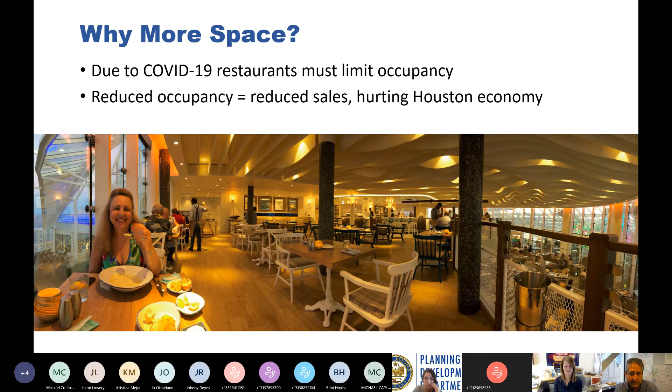We recognize that especially downtown has no off-street parking store by store. So we wanted to look specifically at Main Street to see what we could do to help you. So this is kind of phase two, the More Space Main Street specific part of it, where we're talking about Main Street from Commerce to Rusk, where we're saying, okay, Main Street really doesn't function as a through vehicle street from end to end anyway.

There are a lot of turns, there are a lot of the pedestrian plaza at the south end at Rusk. So if we closed it to vehicle traffic and said sidewalks would remain for walking, but the road space where vehicles go today, restaurants and bars could put tables out in that space because it's no longer being used for vehicles. And we're talking about a pilot program from once we get it up and running through March 2022. So a good long time so that we can really help support you all, and that any investment made, you have time to make that back and really populate downtown so it's active space, and we're both supporting the economics and supporting the livelihood of downtown.

Before I go to that, I do want to say this is a partnership. The city is leading it because obviously we have a lot of levers we need to pull to get this done, but the downtown district, represented on the call by Angie, has been an amazing partner. We've been working step by step all through, as well as with Metro, who, as you all know, has quite a presence on Main Street.

It is not as simple as just closing the street to cars because we've got a train running down the middle of it. So there are many more safety components of this that we're still working through, and we're getting close, but it's all of us together here helping you.

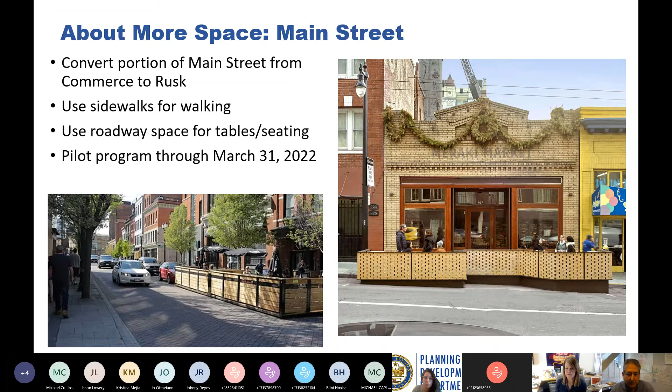So who can participate? We're talking about bars and restaurants in this stretch with the understanding that we have to follow the state and any other restrictions on businesses that are out there. So right now, restaurants can open. So that is what we're focused on right now. We're imagining pretty soon, fingers crossed, bars will be able to open also, and they will be allowed to participate as well. But we can't supersede a statewide, closing, temporary closing of those businesses.

So we have to understand it may be rolled out as those openings happen. We understand that different properties have, some have businesses on multiple levels, and we can accommodate that, but we need them to work together because it's really the building footprint and frontage, which is our starting point. And I'm going to go through all of that in a sec. But if we didn't want people to worry that if they're on the second floor and don't look out on Main Street on ground level that they can't be part of it, yes, there's a role for you here too.

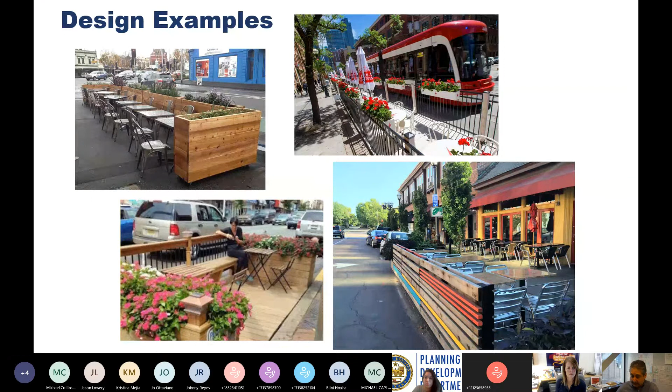So I described briefly what we were looking at. Here are some examples from other cities, what they've done to allow restaurants and bars to open up in vehicle space with different types of fencing or different types of planters, either on the street level or on a raised platform. The top right is in Toronto, which is actually our closest example because they also have a streetcar that runs down their street. So you can see it does make kind of a different form, but it is doable and we are learning a lot from them.

So I want to talk to you about what different buildings would look like and how we can accommodate different forms. I apologize, I'm not a graphic specialist, but I put these together myself Monday night, I think. So I'm hoping you can all work with me.

So imagine the first case is a business in the middle of the block. They're not at the corners, they're at the middle of the block. So if you are looking at a corner and you're looking north, you will see the building line all the way to the left. You'll see the sidewalk, which is 8 or 9 feet or so. Then you'll see the vehicle lanes, which for most of Main Street, it's somewhere around 10 feet.

And then you'll have the rail in the middle of the street, and it continues on, repeating on the other side. So option 1, if you have a business in the middle of the block, you have your building, the sidewalk, and the vehicle lane space becomes where you could put tables.

But one important starting point we realized was that to meet ADA requirements, we need to put in a ramp from the sidewalk level down to the street level. Looking at the street in cross section, that orange block would be a ramp sloping down. A ramp like this has to be, for every 1 inch of curb height, 1 foot long. So an 8-inch curb needs a ramp that's 8 feet long. It does take up a bit of space.

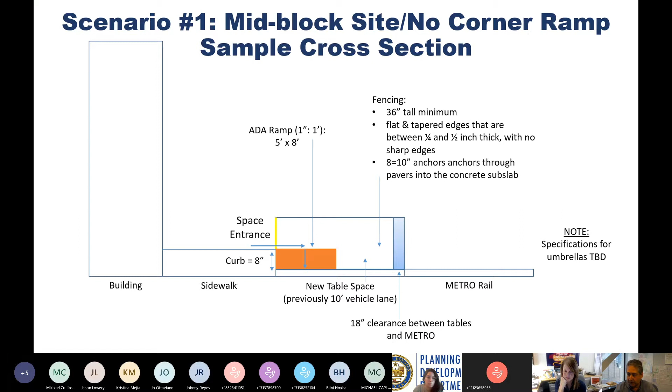Another view of the same idea: this is that same mid-block business looking out from the building line, the sidewalk line, the entrance to the ramp at sidewalk level, sloping down to the right in this version. The space between the ramp and the metro tracks is that space in the roadbed.

We also want to reiterate, and I know you'll talk about it in more detail, that we're envisioning if you're on a corner space, you wouldn't need that because you can utilize the existing corner ADA access. But if you're mid-block, we could potentially place ramps in inactive spaces, so instead of being part of your sidewalk cafe, it's outside of it, with just a side or back door entrance. That way you're not taking up real estate within your street patio.

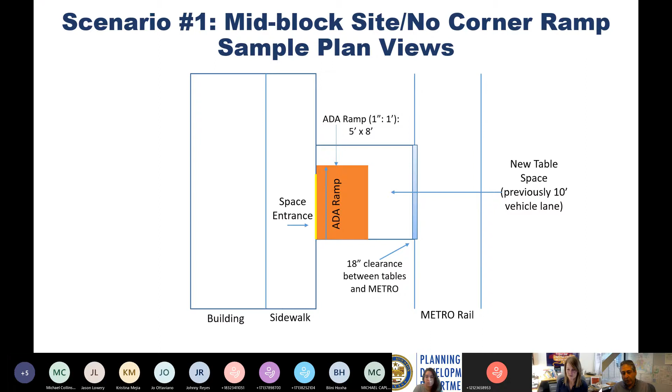Yes, and I'm about to talk about corners in just one more second. Sorry. Yep, no, that's fine. Angie and I have been tag teaming on these, so she'll jump in a bunch to make sure I give all the information. Feel free to put notes in the chat or raise your hand. This is all to be transparent and give everyone the information.

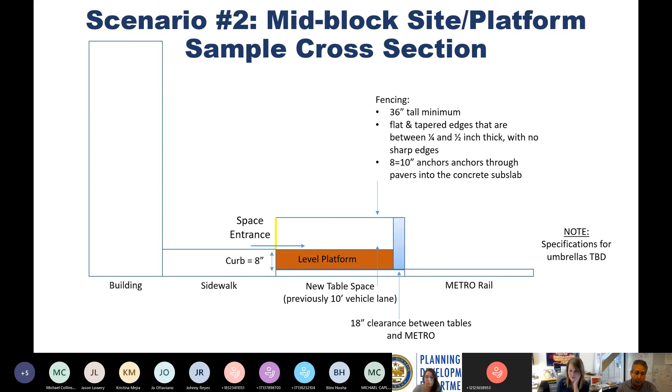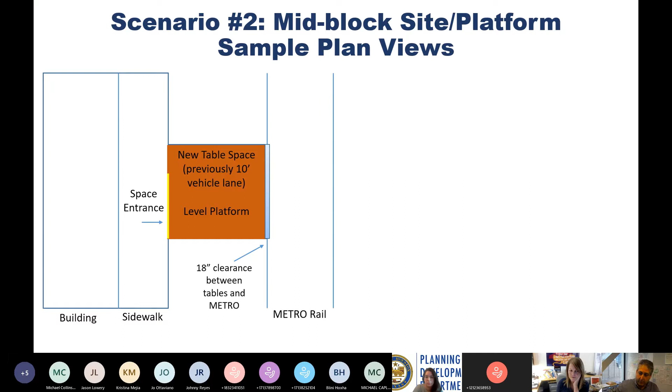Let's go on, there's one more option before corners. One way to avoid needing a ramp is to build a level platform at sidewalk level. This is the same mid-block cross section, but instead of the orange ramp sloping down to an elevated space and street level space, this is one level platform straight across, which actually creates more space for tables. Everything else is basically the same. This is what it would look like from top down: you come out from the restaurant, across the sidewalk, and right out to the level platform.

But going to what Angie was talking about, imagine businesses at the corner. What we get to utilize is what already exists, which are ADA ramps that already exist in the sidewalk at every single corner.

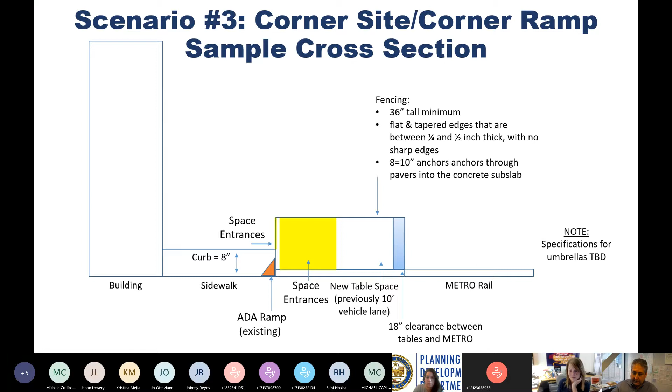So if you're at a corner and we have those ramps, we don't need to add a new one. You can come out your front door, your customer can come down the ramp into effectively, imagine the crosswalk, because you're at the corner, and turn left and enter the roadway level space from there without having to add a ramp. So you would need an entrance at the sidewalk level and an entrance at the street level, but no ramp for it. This is what that looks like looking down from the top, and that does save a lot of space.

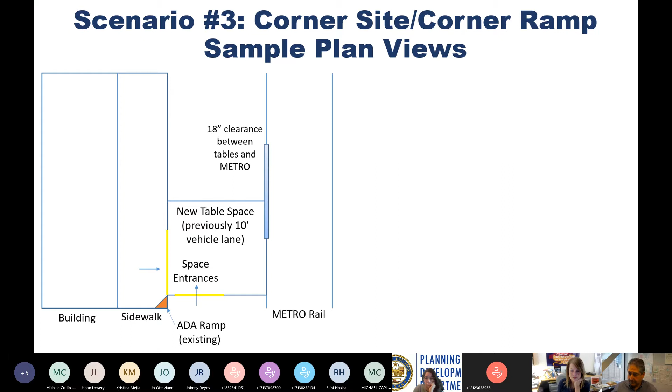We've got tons of information on what ramps look like. The downtown district, being fabulous people that they are and partners, Angie, I don't want to steal your thunder, but are offering to fund those ramps, right? Did I get that right? Yeah, that's correct.

Well, we're expecting that you would not have ramps going directly into your street patio. So if the ramp is located in an inactive space into the roadway, we would build that and cover that expense.

We're about to go through, there are a lot of different combinations about what is going to go on every block based on how many businesses want in. That's going to tell us how much free space exists between there. And it gets complicated. I'm telling you right now, everybody, this is not simple. Otherwise, we would have rolled it out months ago. We've been working every step of the way, so I understand if there'll be a lot of questions here.

Before we go off the ramp topic, if we have one block in particular, the 300 West block, where we have so much density of businesses, we foresee it literally being sidewalk cafe abutting sidewalk cafe abutting sidewalk cafe, or street patio abutting each other. There may be instances where a ramp just is not doable, and we're willing to potentially not require it as long as there is a sidewalk cafe in place that is ADA compliant. So the 300 block is the only one that would kind of fall within that. We want to do our very, very best to make sure that we have ADA accessibility to street patios, but there may be a couple instances where that just can't happen, and so we'll work through those issues.

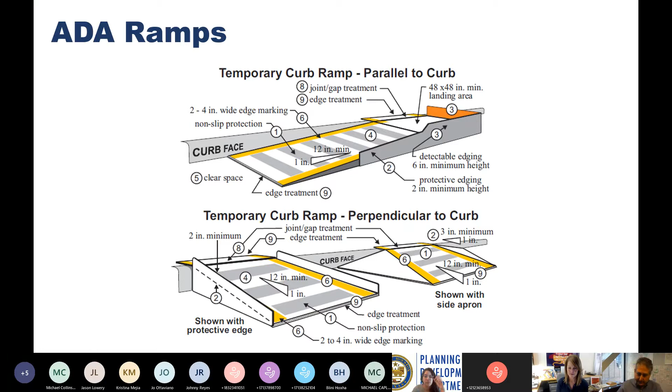Okay, so how much space out there? I'm not even gonna make the joke. I'm gonna leave that alone.

So how much space could you have? In theory, we could have just said every business can have just the linear frontage that their business fronts onto their sidewalk, just extend it out into the roadbed. That would be simple, and that would be the bare minimum. We didn't think that was actually doing as much for you as we would like to do. Part of this is to activate the space, and to have a whole lot of dead zones without activity and have businesses that would like to use more didn't really meet the project goals. So we want to accommodate, we want to provide options that if there is space going unused on your block, we want to figure out ways for you to use it.

And in that case, that corner ramp would also be accessible to you because your patio, your street level is filling up all that space in there. Obviously, if you're just on the corner, you have that space. If there is nobody between you—one good example is Finn Hall and Shake Shack, there are no other restaurants or bars in there—so those two businesses can go halfway to each other in the street bed. We want to fill that space as long as they're going to use it for tables and chairs.

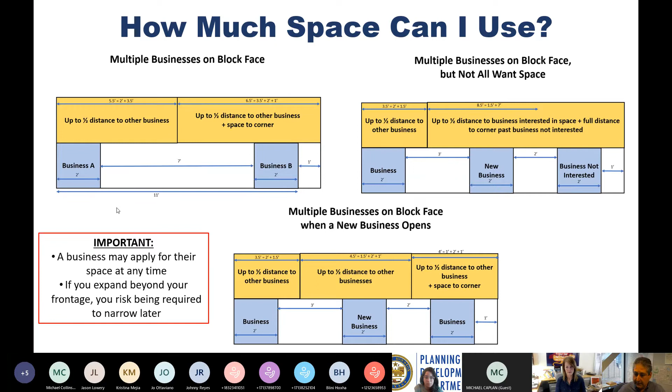So some additional components. We are packaging this as a proposal to City Council, and I'll go through the schedule in a moment. City Council may accept it wholesale, or they may make changes. The mayor has been incredibly supportive. Councilmember Gallegos, who represents this district, has been pushing us forward, and he's very supportive as well. But everything we say here is still subject to final approval by City Council.

We are proposing to them no fee for participating in this program. What we're developing right now, we don't have it yet, but we're working on it, is the application package that Angie was just talking about, which we're going to make as easy on you as possible while making sure we have all the information to know people are being safe.

So things like who's the business, who's the applicant. We will provide the specs or recommendations on design material, but you'll have to show us what it will look like, sketch it out. You're going to have to confirm that you understand the program details, including that very important point that if you are bigger than your frontage, you may need to narrow later. We're going to make sure everybody confirms that so we don't have any confusion later that was not clear, and that you are responsible for your TABC requirements.

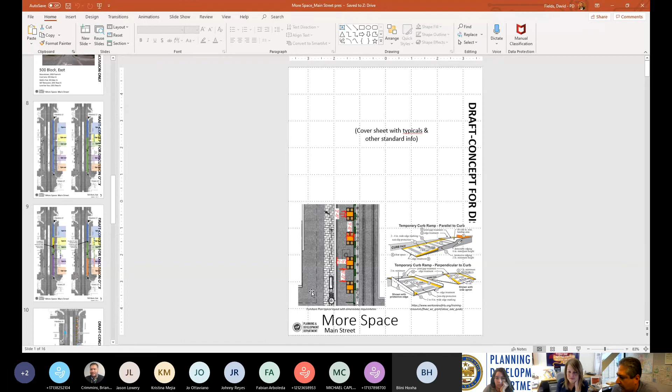500 west, between Prairie and Texas. Both? Oh, we have both locations. Okay, east side, got it. So I'll start on the east side. 500 east, can folks see this?

Okay, now remember what Angie said at first, we have randomly assigned ins and outs at this point. These are not set in stone. This is not moving forward. These are for illustration, concept only.

Give me a street number. Did you say Moonshiners? Moonshiners and Boots and Shoots. Boots and Shoots is 506 Main. So 506 is the west side, right? Yes. Okay, so we'll start with Moonshiners on the east side. Hopefully you can see my mouse, that's the lavender color box that's popped in at the top corner.

Okay, so just as a starting point, work with me here. If nobody else on that block wanted space, in theory, you could take that entire block length and fill it with tables and fencing. Understand though, we're asking you to only take space you're really going to use. And because you're on the corner, no ramp would be needed because we have the corner for you.

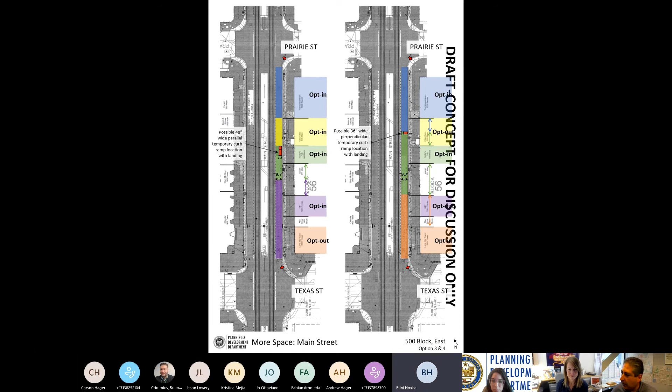And then different combinations depending on if some do or some don't opt in, we're going to have to work with you all as we see who's interested. And then I think you wanted to look at the west side also? Yes, please, if you don't mind. Yeah, of course.

Boots and Shoes is also the furthest one north because there's no business right now in the corner. It's vacant as far as I know. There is a business there. There is, I haven't been able to get in contact with them, so we'll just have to. Okay, well, is it a restaurant? I'm not sure exactly what it's leaning at. I think it's more of a bar. Yeah, a little bit more of a, not sure, nightclub. It's supposed to be a restaurant, but. All right, well for sake of argument, let's call it a bar which can't open right now.

We'll use that as our concept idea. If they can't open and you wanted to take that entire block to the corner, you could, with the understanding, and I'm saying this several times, if they come in later and want their space, you'd have to pull back from there. Understand. Okay, and Boots and Shoes is a bar as well, but Bini, we need to try to find a contact for the corner space just so we kind of have an idea if they think they'd be interested. So you don't go through a process and something happens.

And then south of you, that is vacant, right? Yes, so you could go halfway down to the next business, which is a little bit down, because nobody will be taking that space. Correct. With the understanding that if a business goes in there at some point and wants it, you'd have to pull back again. No worries on that account. Yes. Does that answer that? Does that make sense?

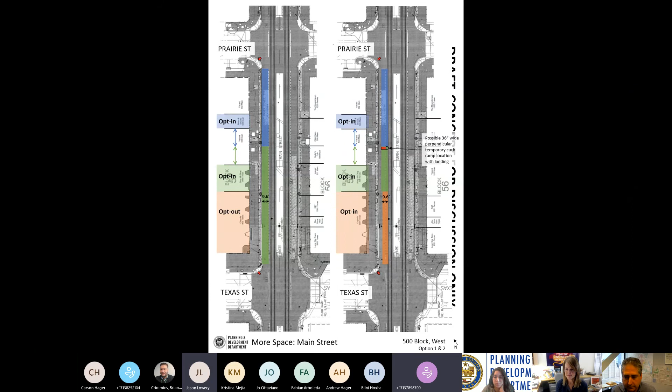Anybody else on the call would like to talk about a block? Yes, can we look at the 300 block, please? No, west side, that's the busiest one, right? I mean, 400 block, sorry. 400 block, we can do them both. So here is 400 west. And which one were you interested in?

With Bovine and Barley, and then our closest neighbor, I think he sent a typed text on here as well. Commoner, yeah. Okay, so Bovine and Commoner here and here. So we're not sure yet about what is that? Local Foods? Do we know Local Foods yet? Local Foods, the south corner.

Yeah, so if Local Foods did not want in, you could go all the way to the corner and then not need a ramp. If they did want in, you would not be able to go to the corner because they'd be there. North of you, that's vacant, so you could go halfway to the Commoner. So that expands your space. With that caveat, if somebody comes in later and wants it, you'd have to pull back. Right, and I apologize, my dad was a lawyer, so I hear his voice with the caveats saying make sure you say all the clauses and everything. And the Commoner also could come halfway to you.

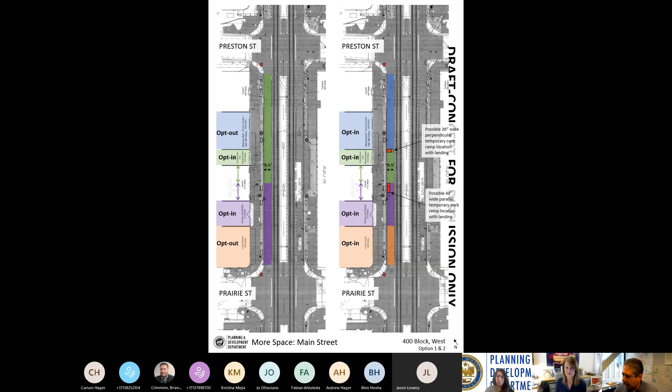Okay cool, I think I heard 300 Block West as the next one. It's complicated because there are a lot of businesses here. Did anybody want to focus on one or two particular ones? I'm good on that, I actually said it by accident - I was looking at something else, I forgot where he was located.

Anybody else want to talk about a block? Okay, just without requiring a commitment, just kind of a straw poll - people interested in this? Do they want us to be working on this for you? On which part, what do you mean? The overall program, doing it. Oh yeah, I think it's a great idea. Okay good, that helps, excellent.

Great, so here are our next steps, out to everybody from either session. As you go through it, please don't be shy - if you have a question, reach out to me and Melissa, reach out to Angie. We're talking many times every single day, we're moving this forward. What was that? It's just some reverb, David.

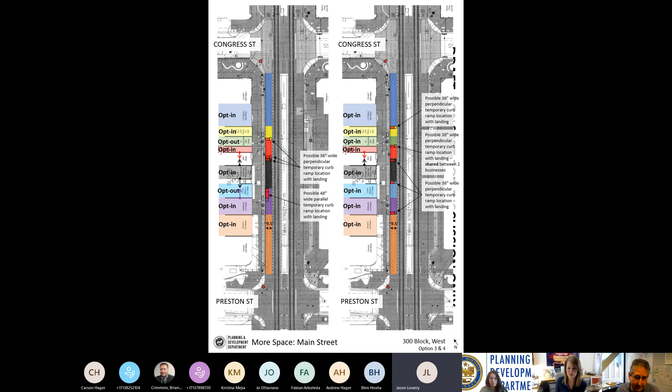Oh okay. If you are interested, start thinking about what it looks like for you, how much space you would use - recognizing we're asking, if you ask for space, you really want to use it. If you work with an architecture firm, a design firm, they always have good ideas - we'd encourage you to talk to folks who do this regularly. We will continue to update you as we move forward so that when, fingers crossed, if and when we have City Council approval, you're ready to go as soon as possible. We're doing everything we can to really get critical path things done before that point.

That's awesome, good, I got one more point - this is Carson Hager, I'm at 410 Main and 308 Main. You guys have 308 Main unallocated - we absolutely are interested in doing this. Yeah, I think Carson, at the time I didn't know you guys were taking over that, so that was probably pre our conversation about Cherry. Okay great, thank you. Yeah, but I've noted that you guys are in for both spaces. Beautiful, thanks. Yep.